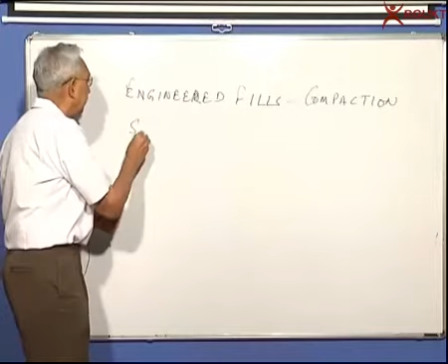Soils in nature, as we said, are a three-phase material which has a solid component, the grains. The liquid component is the water, and the gaseous phase is air.

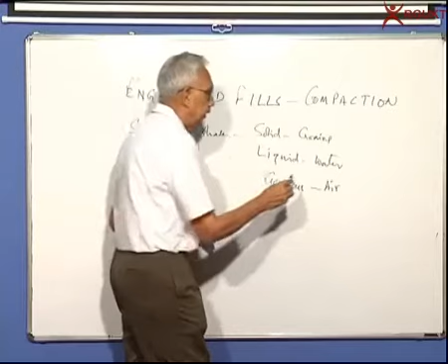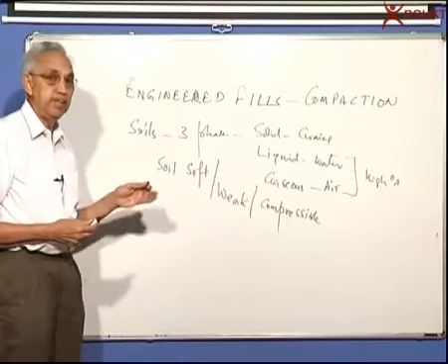Now, if in the soil these two are high percentage, obviously the solid part is less and the soil becomes very soft, weak, or highly compressible. We cannot do anything on that kind of soil, so we need to engineer the soil so that you get a very strong and stiff material.

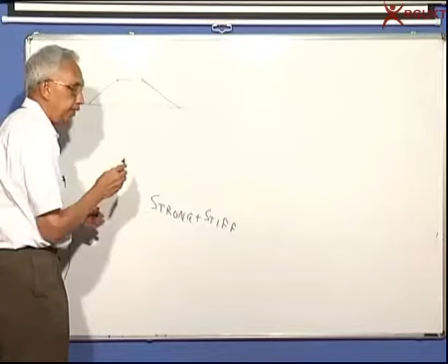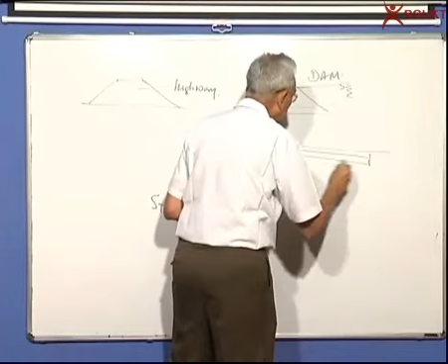For example, you want to build a highway. I want to build an embankment so that I can put the highway here. I want to build a dam with the soil so that I can store water. I can want to have a road with different layers: the bituminous macadam, wet mix macadam, and the gravel GSB layer, subbase, and the soil.

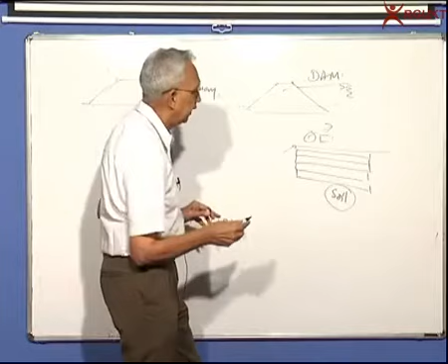If this soil at this stage is not strong and stiff, whatever vehicle goes on, a bus or car, will get deformed, because you cannot afford to spend too much money on this new construction. The best way would be to make sure these are well compacted.

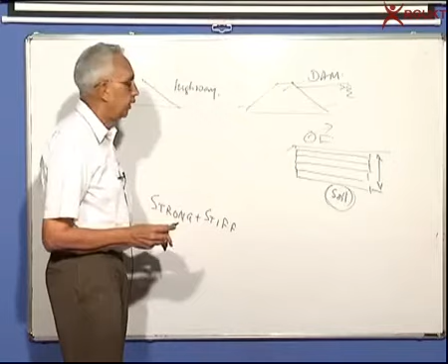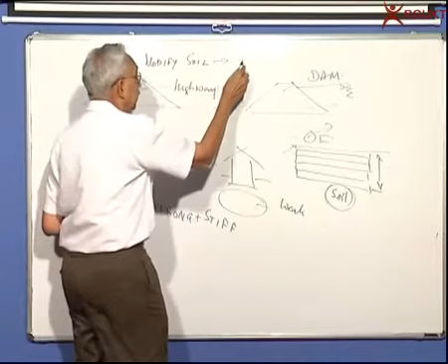You may also like to build a house, and if the soil here is again soft or weak, we need to excavate and compact it. So what we are trying to do is, can I modify the soil so that it becomes good? Good, by that I mean strong and very stiff.

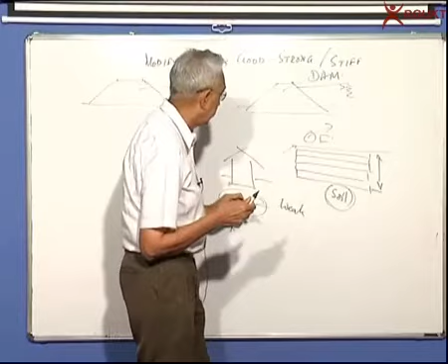When I say strong, I am talking in terms of strength - it can carry more load. When I say stiff, it means the deformations will be less, very small, which most structures can handle. For example, if I have a building, I would like to have a maximum settlement of the order of 25 to 40 millimeters. In case of roads, again the same problem, and we don't want that in embankment dams, highways, or railways.

It could be a railway embankment too. You will be seeing that in your normal day-to-day practice. Many of these are built.

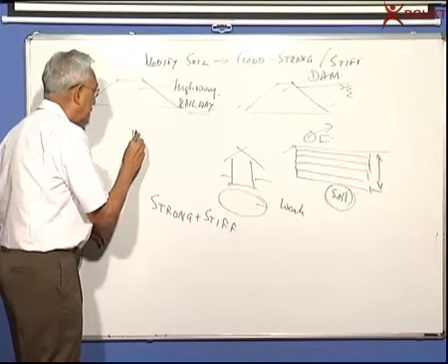Similarly, when I want to build a retaining wall, I would like to fill it up with some material so that I have two elevations - one elevation top, another elevation bottom. So when the ground level is different, I need a retaining structure. The soil below, behind the retaining wall, also needs to be compacted.

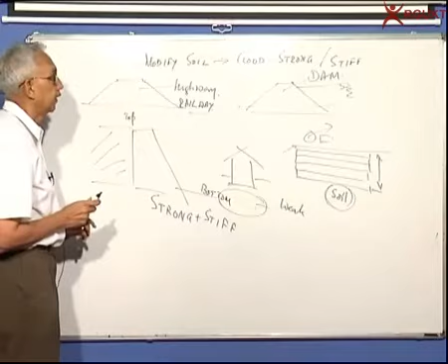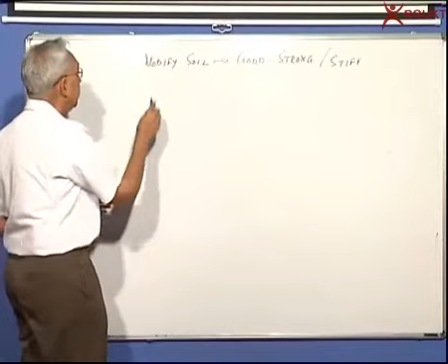And how do I modify it? Either I have to remove the air or remove the water. This modification is by removal of air or water. In all our engineered fill, this is what we do. Whereas in foundations, we remove water - this is a very slow process.

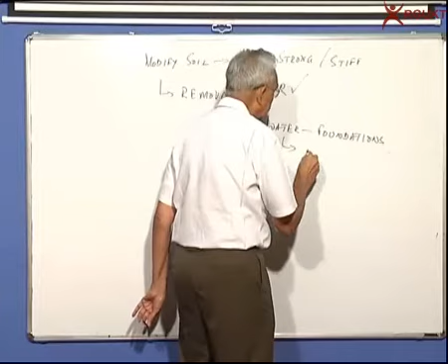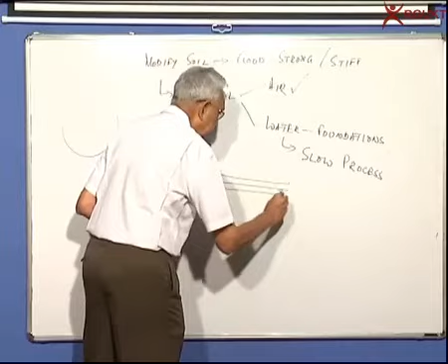So when I want to build an embankment, I go to some area - I call it a borrow area or borrow pit. I remove the soil, excavate by means of a dozer or any excavator, and put it in a heap. I take it by truck and compact it at the site. So when I'm compacting it, I should do it in such a way that I get the best result.

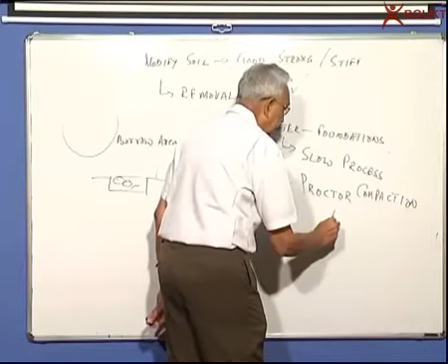In order to find out the best way to do it, we have what is called the standard Proctor compaction test. It was developed by an American highway engineer way back in the 1930s, and we use that very often.

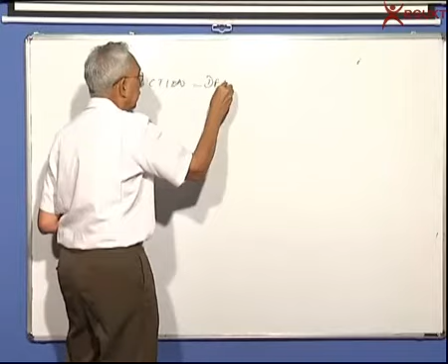What we try to do is, we know that by adding water and compacting - that means adding dynamic load - you can bring particles closer, and that process is called compaction. It is densification by removal of air. Please remember, in compaction we remove air. The phenomenon called consolidation, which we'll talk about later, is densification by removal of water.

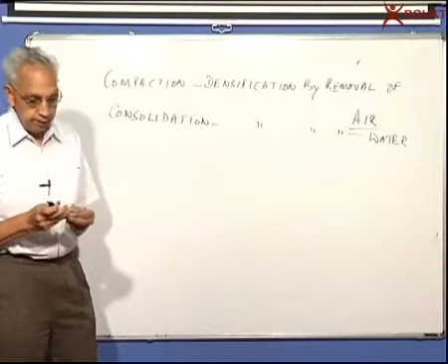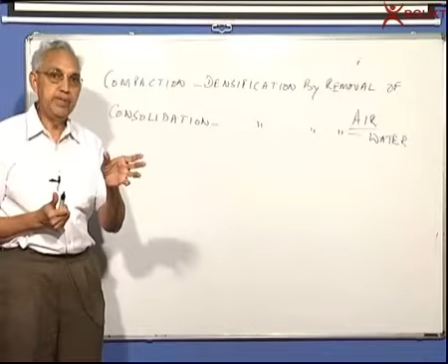We find that if I add a little water or some amount of water, I can get higher density. If I add too much, again it becomes very soft. So somewhere in between the minimum and maximum, we have what's called the optimum. In order to find that, Proctor came out with a simple test.

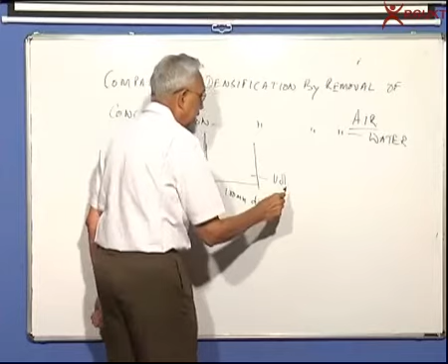He takes a cylinder which is 100 millimeters in diameter. The volume is equal to 1/30 cubic feet. If you want it in our measuring system, this is less than a liter, very close to that.

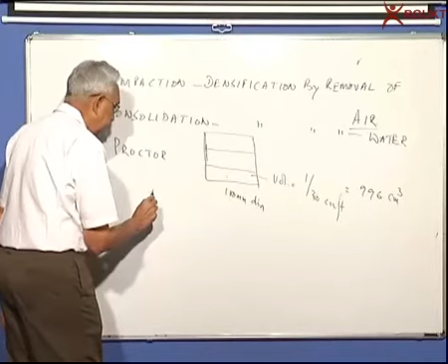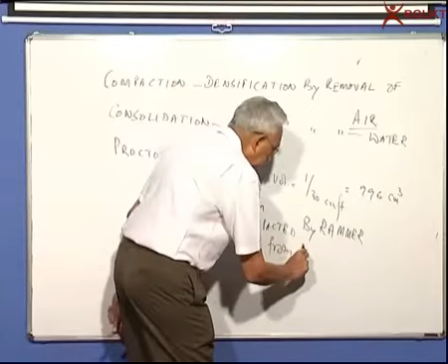He said, let us fill it up in 3 stages, and each layer is compacted by a rammer. I'll show you in my presentation. Its weight is 2.5 kilograms, and we drop it from a height of 1 foot, that is 300 millimeters.

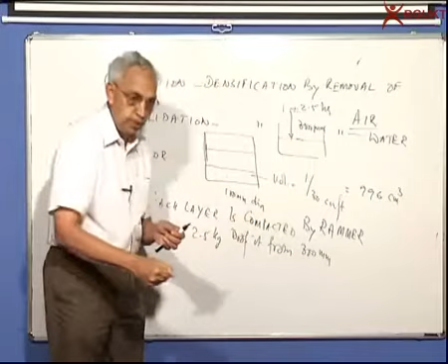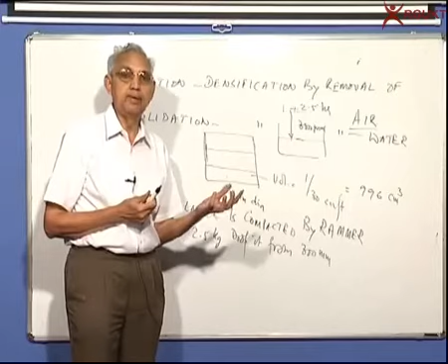Suppose I fill it up loosely, I drop a weight - the weight is 2.5 kg and the height of drop is 300 millimeters. You can see that when you drop a weight, it will densify the soil, make the particles come closer. Now, can the water escape? Because water is very small in volume compared to the air, so air is easy to push out. And when you remove the air, the particles, along with the water, pack better.

And then we give 25 blows for each layer.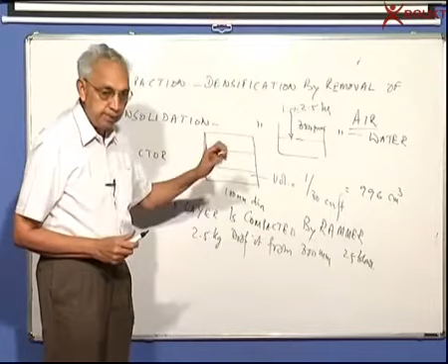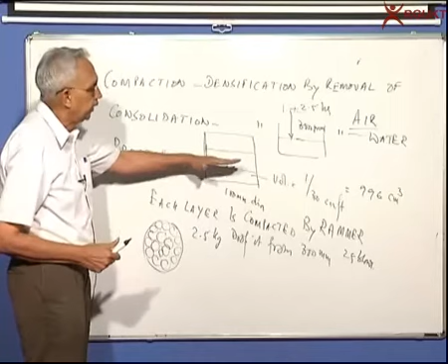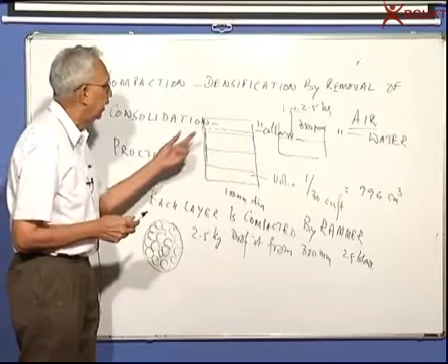So I put X amount of soil, maybe 150 to 200 grams, and drop this weight in a particular pattern. If this is the plan of the cylinder, I'll put the rammer, move it around, and compact it. I give 25 blows, and get the first layer. Then I put the second amount of soil, repeat the process, and the third layer. I realized I need a collar, since the final soil layer may come slightly above the cylinder height. I remove the collar, cut it, and I'll have compacted soil.

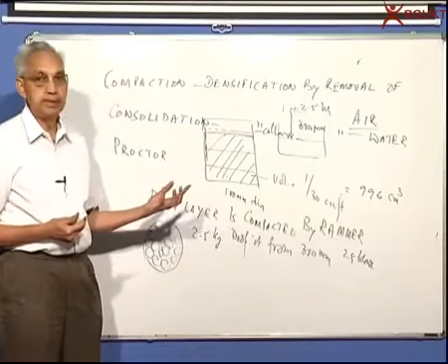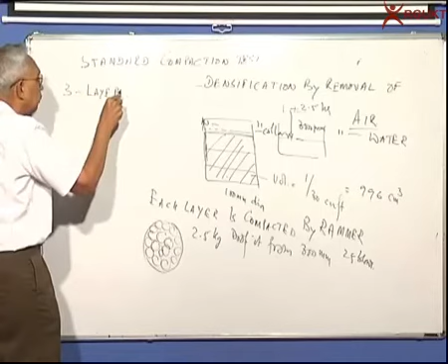I have soil compacted in 3 layers by a rammer whose weight is 2.5 kilograms. Each drop is from 300 millimeters. Each layer is compacted with 25 blows, and you will have 3 layers. Please remember, this is called the standard compaction or Proctor compaction test: 3 layers, hammer weight 2.5 kilograms, drop height 300 millimeters, and 25 blows.

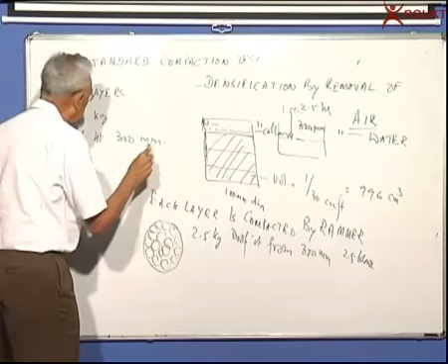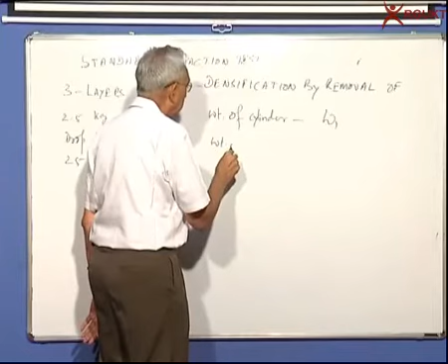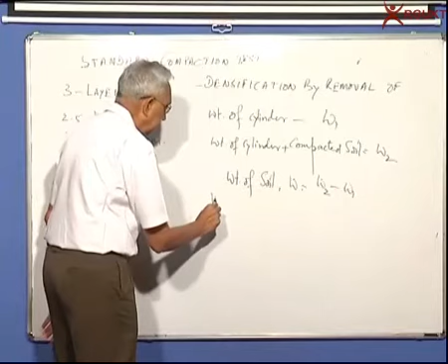Then you prepare the sample. You take the weight of the soil here, which means initially I take the weight of the cylinder, equal to W1, weight of cylinder plus compacted soil equal to W2. What will be the weight of soil? Equal to W2 minus W1. We know the volume of the cylinder is equal to V, a standard value of 996 cubic centimeters. So can I get unit weight now?

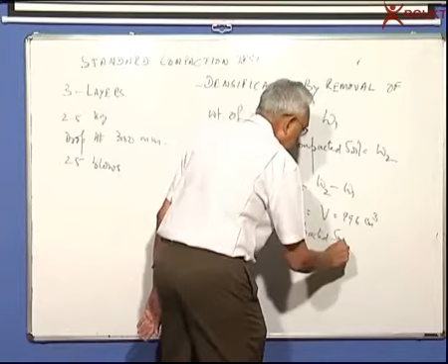Unit weight of compacted soil, gamma total, is equal to W by V. I'll get so many kilonewtons per meter cube or grams per cc, whichever way you want to use, mass units or force units.

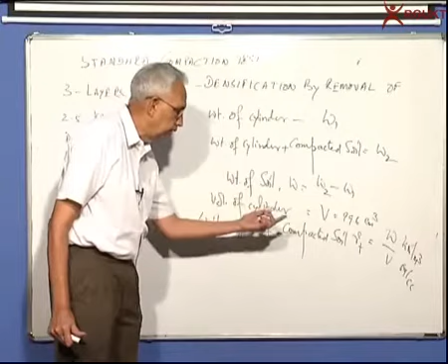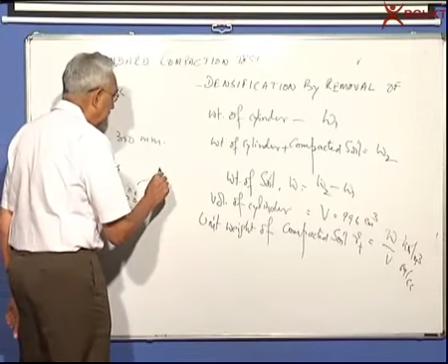So what I do is one test gives me one density. After the compaction is over and I have taken the weight, I take 2 or 3 samples, put them in the oven so I can get water content. You have taken the soil, added a little water, did the compaction, found out the total unit weight. We need to know the water content, the amount of water inside the compacted soil. We repeat the same test 4 to 5 times. So I get a table.

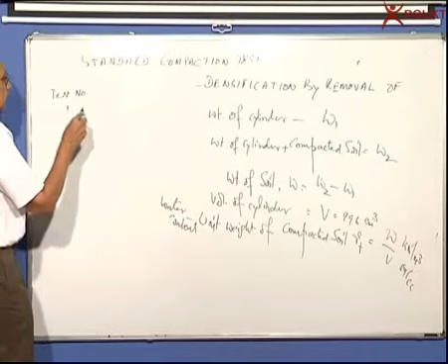I have test number 1, then gamma total, water content. So I'll have gamma T1, water content 1. I repeat the test, next time adding 2% more water compared to the previous case, and get gamma T2 and W2. The third experiment I do with 2 more percentage of water and get W3. The fourth test continues adding more water, and the fifth test is finally with the highest water content, which can be about 5 to 10%, 8 to 10% more than the starting value.

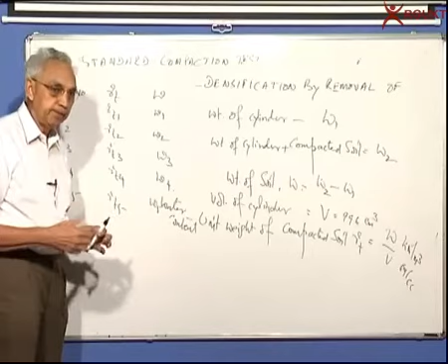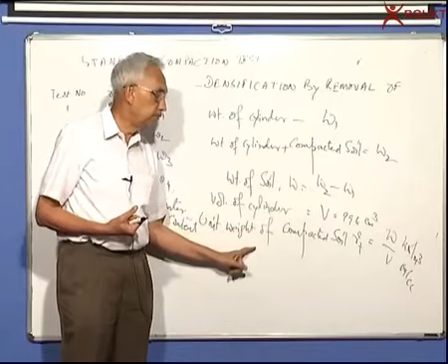What you have done is repeated the test using the same soil. First added a little water, maybe 5-6% with respect to the dry weight of the soil. I do the compaction, find out the density by measuring the weight of the cylinder with the compacted soil. The difference gives me the weight of the soil. I know the volume of the cylinder, so I know the density or unit weight, which I call total unit weight.

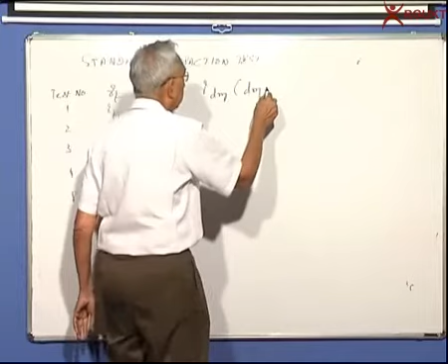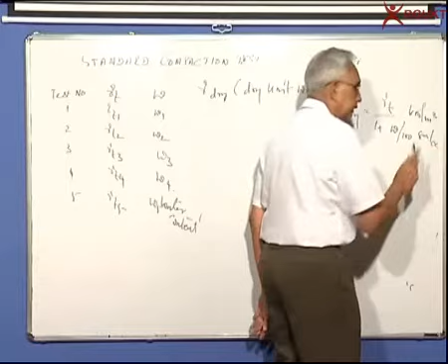Once I know the total unit weight, can I find out the dry density? Can I say I want gamma dry, the unit weight under the dry soil only? Remember we solved this in an earlier lecture: it's equal to gamma total divided by 1 plus W, or divide by 100 if expressed as a percentage. So I can get gamma dry, again in kilonewtons per meter cube or grams per cc, depending on the measure. So you will have gamma dry 1, gamma D2, gamma D3, gamma D4.

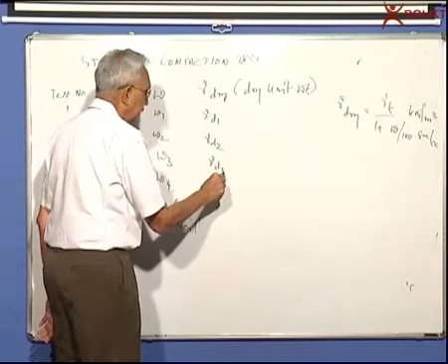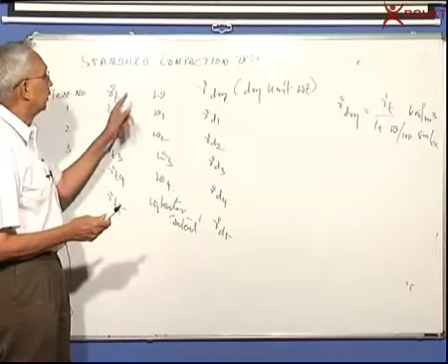So you have done the experiment 5 times. Take the borrow material from wherever you are getting it for the embankment, pavement, subgrade, dam, or whatever Proctor compaction test you want to do. Mix it with some amount of water, do the compaction, find out the total unit weight and the water content. From there you get the dry unit weight. You have to repeat it.

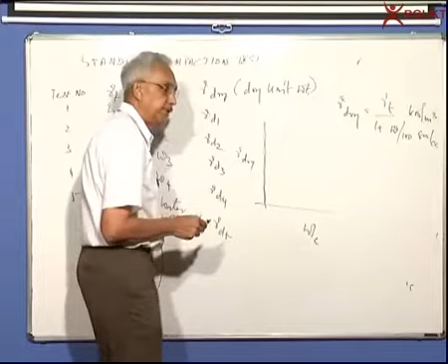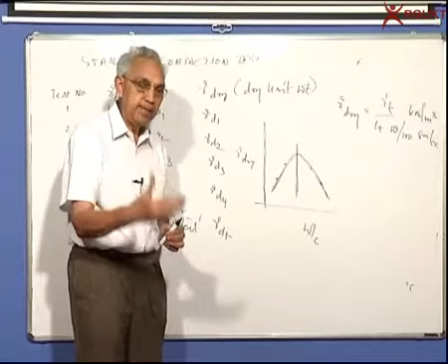Now if I plot water content versus gamma dry, we get a very interesting phenomenon. You get a curve concave downward. What happens is when you add water, initially the dry density increases, but after reaching a particular value of water content, any further addition will actually reduce the dry density. Where you get this maximum is called the maximum dry density or unit weight.

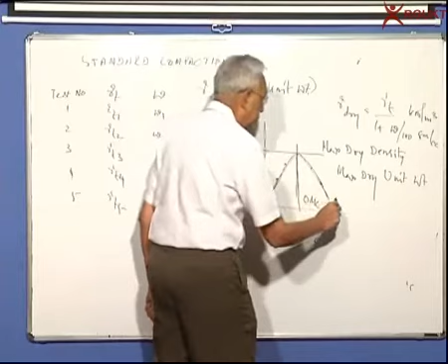And the water content that gives this is called OMC, meaning optimum water content or moisture content. Please remember, the dry density is the one that gives you the best indication of how the particles are packed together.

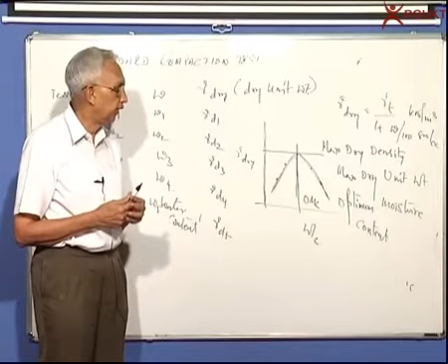If I am able to pack them as close as possible, I get the best material for engineering. So what you should do is find the optimum moisture content, mix the right amount, maybe 11%, 13%, or 15%, and compact it using the standard method so that you get the maximum dry density. This is best because at this point the strength of the soil is high and deformations will be low, since you've packed the soil particles very close.

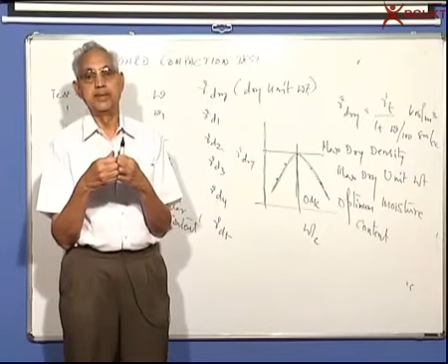When I increase the water content, why does the dry density decrease? Because after you reach the best packing, any extra water goes between the particles, pushing them away from each other, which decreases the dry density. This is how we determine the optimum moisture content.

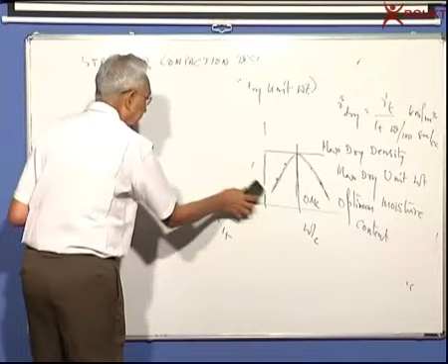We also have what is called a modified Proctor test, used for very important jobs like an airfield pavement. You don't want the aircraft on a flexible or deformable soil, or you want to compact backfills so there is very little deformation. So we have what is called the modified compaction test.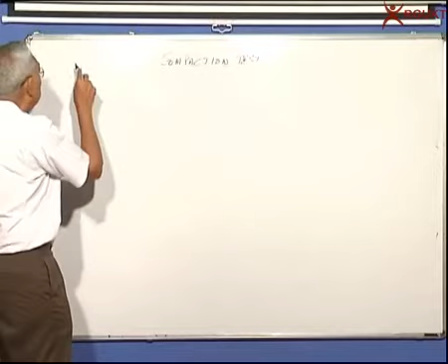You can also call it modified Proctor. All we do is increase the weight of the rammer to 4.5 kg, and the drop height is increased to 45 centimeters or 450 millimeters. The rest remains the same.

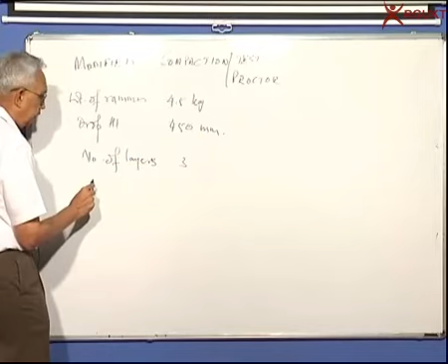The number of layers is 3, and the number of blows for each layer is 25. What did we do? We almost doubled the weight and increased the height by about one third. So the energy we are giving is more, and the soil gets compacted better.

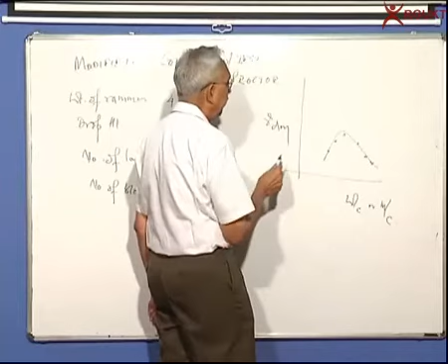If I now plot water content, or moisture content, against gamma dry, the first curve is from the standard Proctor test. If I do the modified Proctor, I get a curve shifted to the left, and gamma dry maximum with modified Proctor is higher than gamma dry maximum from the standard Proctor test. What happened? We gave higher energy, so you get higher dry density.

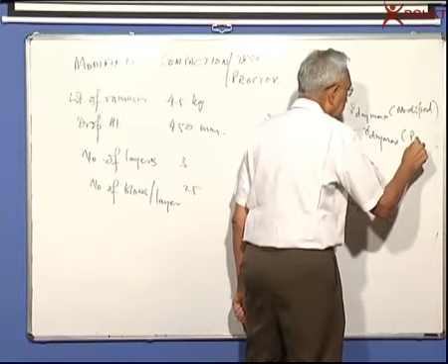But the other interesting thing is the OMC values: OMC 2 and OMC 1. From the modified Proctor, you need less water to reach the maximum dry density. So this is how we try to determine these values.

This standard Proctor is for ordinary jobs. For very important jobs where you do not want any deformation, we go for the modified test. What you find is the particles arrange in a denser way. This is mostly done for fine-grained soils - silts and clays with some sand, etc.

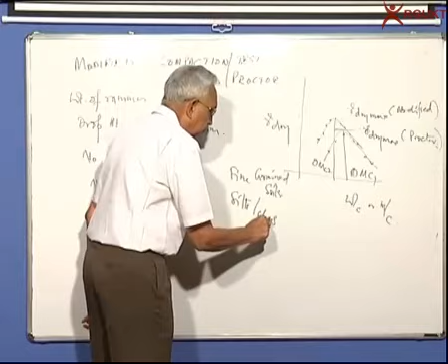Well-graded soil is best, like the moorum we get around Hyderabad. But if you have fine-grained soil, you have to use this compaction approach. The idea is to find the optimum moisture content and the maximum dry density corresponding to it, and if I use those, I get the best result in the field.

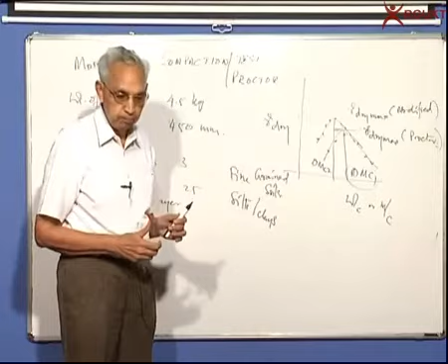Just to give you a plot, if I plot strength versus water content, I also find the maximum strength corresponding to this same point. So the idea of compacting to the maximum dry density is to get the maximum strength.

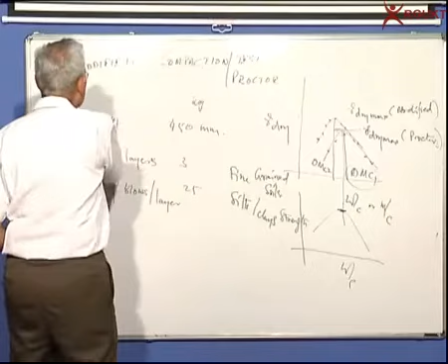The test is very simple, except you need to use some amount of energy. If you're working in a lab, you probably have a machine that does the compaction. Otherwise, you may have to do it using your arms and hands, so you'll become much stronger after doing the compaction test. Please remember, this is how we do that.

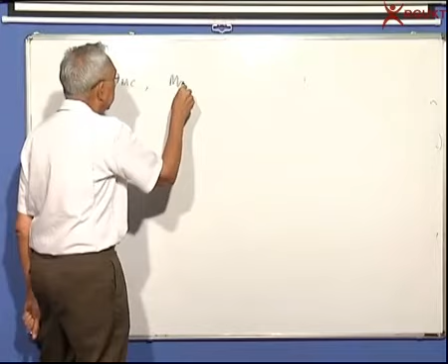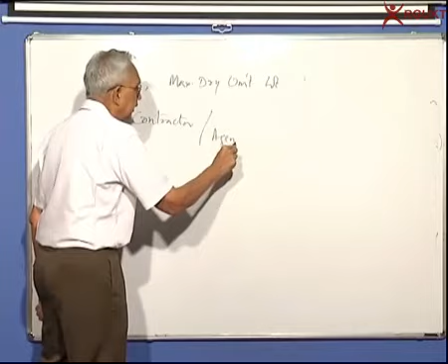So once you determine the OMC and maximum dry density, you tell the contractor or agency doing the job at the field to follow these values. But how do you make sure they are doing a proper job?

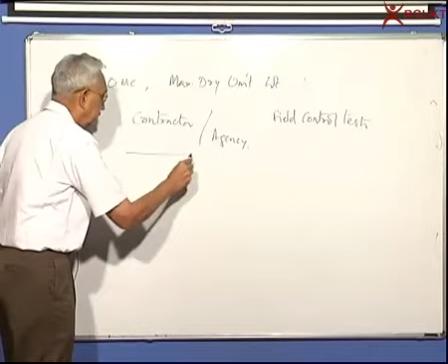So what we call a field control test. You have to make sure they are following your recommendations. When they do the compaction at the site, they do one layer. Usually they start with about 300 millimeters or 250 millimeters, which is called the lift thickness.

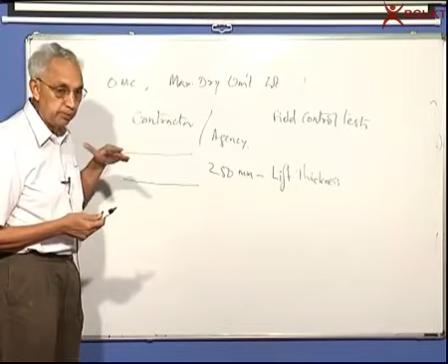Then they compact it with one of the rollers. There are different types of rollers - smooth drum, vibrating drum, sheep foot roller, pneumatic, etc. You tell them to run it 5 or 6 times, going back and forth, and it then compacts the layer to a definitely smaller thickness.

What you then do is take a sample at every 5 meter or 3 meter interval and determine the water content. That's not a problem, because you can take a small sample, put it in a plastic bag, seal it, take it to the lab, and determine the water content.

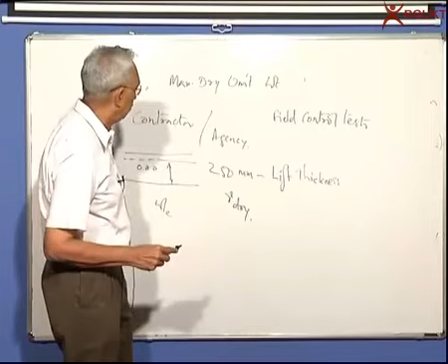But how do I know what dry density was achieved? To do that, one of the simplest ways would be to push a tube, called a core cutter, into the soil, fill it with soil, and then determine its density. That's called the core cutter method.

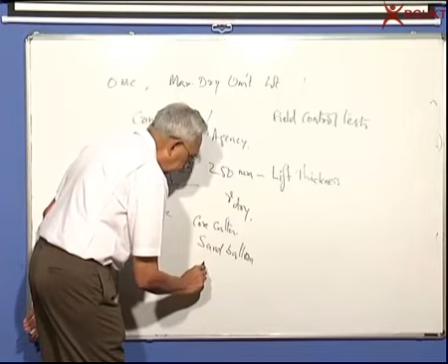There are two other methods called the sand cone method and the balloon method, and there are some nuclear methods. The other one uses water or a fluid. I'll illustrate them through my presentation.